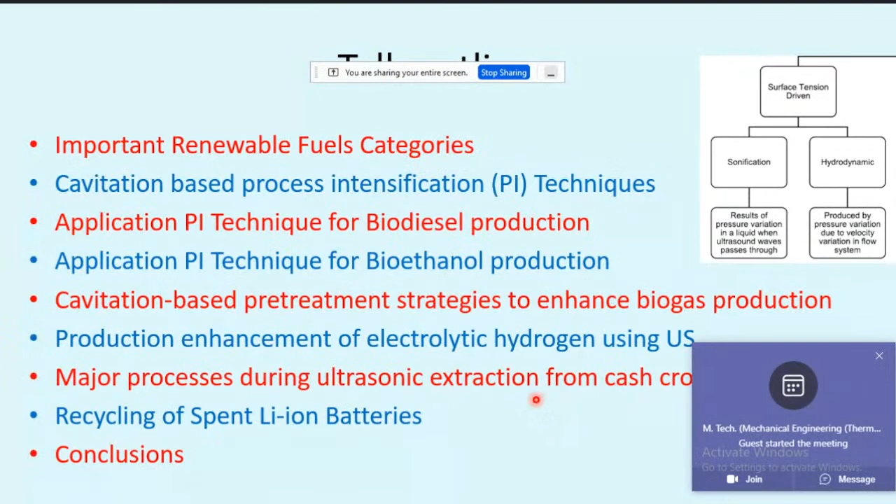Besides this, another application is ultrasound extraction from cash crops, to enhance farmers' income. From that point of view, this process intensification technique can play a very important role, and it can certainly be incorporated in agriculture. Then it will certainly enhance the income of farmers.

Of course this is not related to bioenergy, but the point is that there is recycling of spent materials, is that correct? Are there any disturbances?

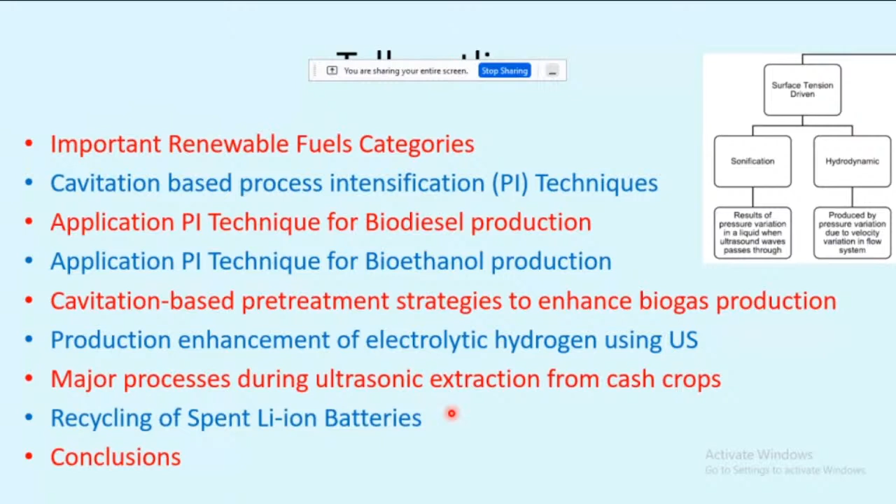So I will continue. Another important application is that nowadays a lot of stress is given on lithium-ion batteries, and once the battery is spent, what to do with that? We can have recycling of spent batteries, and these techniques can play a very important role for sustainable recycling. That part is also very important.

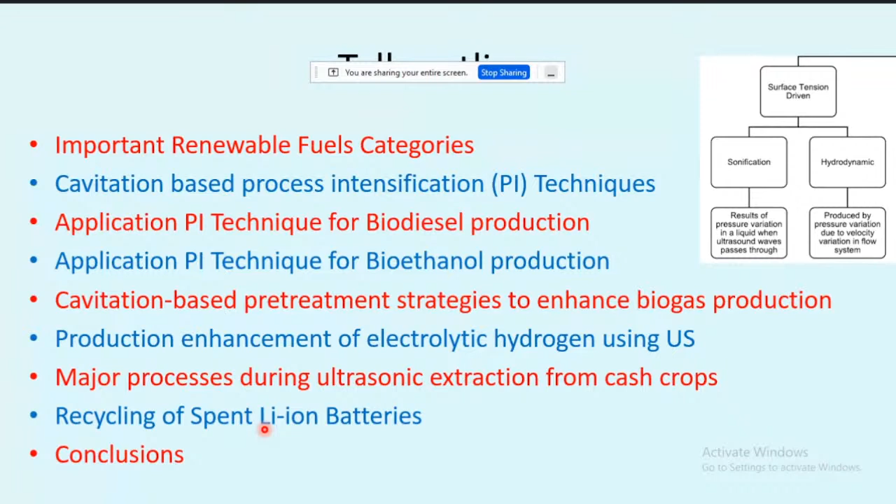With this index, I will start my discussion with the different renewable fuel categories. The main fuels used for energy are: biodiesel, a substitute for diesel; bioethanol, a substitute for petrol; hydrogen, which is added with natural gas to increase flame velocity so that performance in a gas engine increases—in Delhi, natural gas is used with a percentage of hydrogen mixed in.

But what is the sustainable source for hydrogen, and the techniques should be energy efficient as well as industrially viable? People are still searching, and across the world people are working on this, because hydrogen is considered the best fuel as it has no impact on the environment.

Besides this one, biogas—since we are an agriculture-based country, biogas is not a new thing. But how to increase the quantity as well as the quality of biogas, that is the challenge. Besides this, the battery is another introduced technology, and how this battery can also use those techniques, how we can improve it.

If you consider the sources, categorized recently, you can say Tamjidi et al. has classified the different sources: vegetable oils, animal fats. Of course, in our country, animal fats are used little due to religious purposes, so we are not using that one. Otherwise, lard, tallow, poultry fat, fish oil can be converted into biofuel.

Vegetable oils, the edible oils, are there. In our country, the price of vegetable oils is very high, and if you convert that one, there will be a lot of problems—the food versus fuel crisis is there. So we cannot use edible oil for conversion into biofuels.

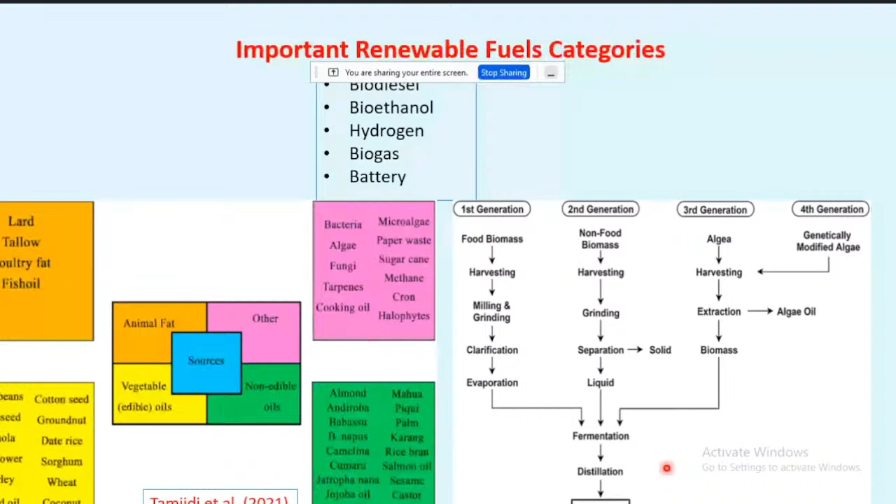Before I come directly to the sonoreactor, let me classify things. Normally, in conventional techniques or reactions, mechanical stirring is the most commonly used method, used by people for the last 3 to 4 decades.

In that case, two immiscible layers of liquids are continuously stirred using mechanical stirring. I have not shown the diagram, but due to diffusion, which is a very slow phenomenon, it is time consuming, sometimes requires high pressure, and requires reflux conditions. So this conventional technique has become outdated, but there is no choice.

Your industry follows it until unless some alternative is given to them. It's time consuming, energy intensive, and requires a lot of stringent conditions. Due to that, conventional mechanical stirring is now almost outdated.

Now what is the substitute for that? The techniques that can substitute these conventional mechanical processes are what we call cavitation technologies. This cavitation technology can broadly be classified based on sound waves, which we call sonication, and due to pressure and velocity changes, which we call hydrodynamic cavitation. But more or less the principle remains the same, and in both cases, they are complementary to each other.

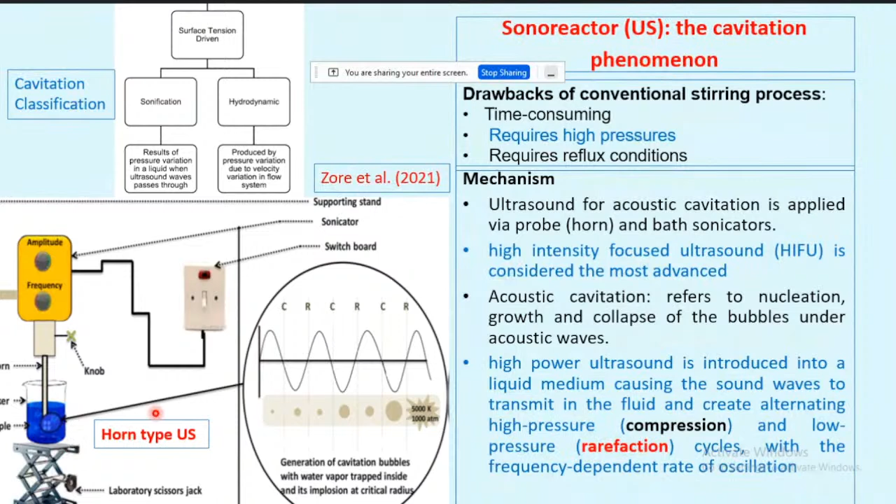This is a real success - chemistry people call it sonochemistry, physics people call it sonohydrodynamics. We shouldn't label it just as chemistry; nowadays mechanical engineers and even environmental engineers have entered this field. If a system can solve a problem, engineers take interest, while scientists view it from the angle of enhancing reactions.

Lots of papers are available as far as science development is concerned. So ultrasound has played a very important role in developing concepts and enhancing them - its contribution is tremendous.

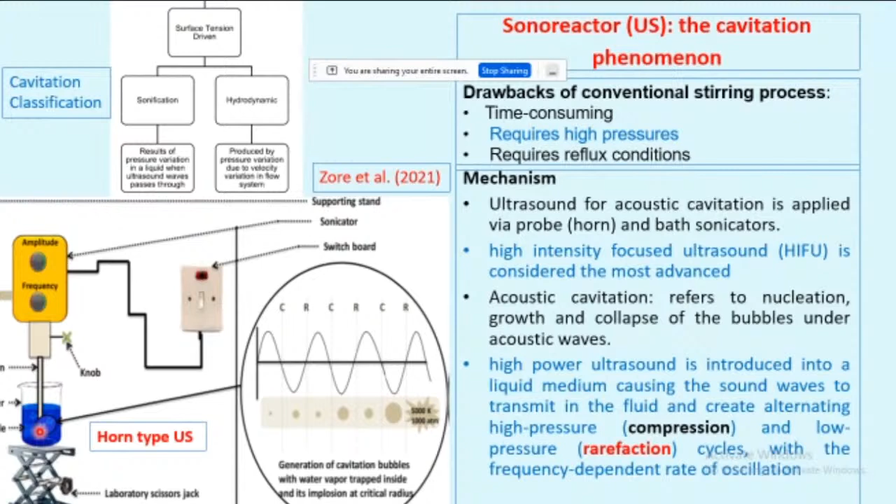So now I'll talk about the mechanism by which this continuous compression and rarefication enhances the reaction and yields very high product yield. For that, let's go to the next slide showing different features of ultrasound - these combined features work very well, which is not present in mechanical stirring.

In mechanical stirring, reactions are very slow, taking hours, maybe 10 or 15 hours. Whereas with ultrasound, even a stringent reaction can convert reactants completely into products within half an hour or one hour total. The main feature is time and energy saving, due to micromolecular mixing caused by acoustic irradiation and the generation of hotspots.

So microscopically fast changes occur - and I'm using the word implosion, not explosion. If the bubble size increases and explodes, we call that explosion. But here the bubble implodes, meaning it becomes smaller once it's broken. This implosion of bubbles causes the mixing rate to become very, very high.

Another reason is that due to this mechanism we get high yield and selectivity - selectivity may have different varieties. Physical and chemical transformations are altered because of the cavitation phenomena, causing efficient agitation, dissolution, very high heat and mass transfer rates, and reagent sonolysis.

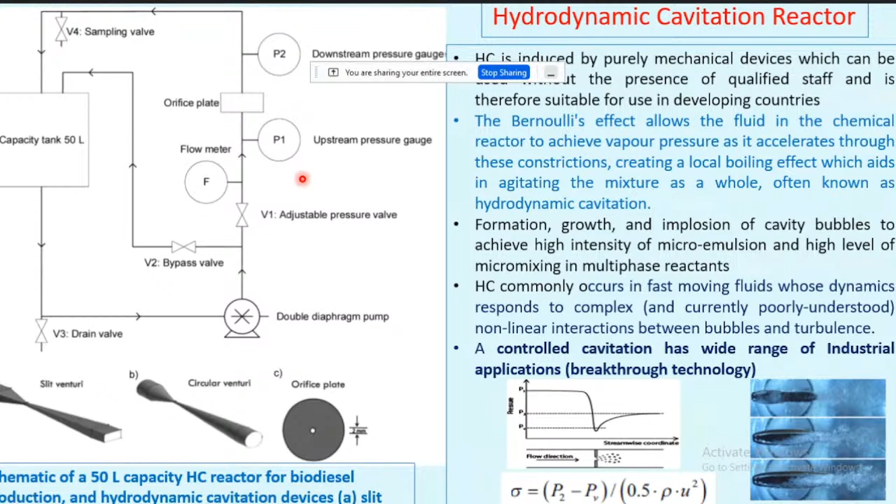Now I have talked about this hydrodynamic cavitation based technology from a scale point of view, they are much superior as compared to ultrasound. But initially ultrasound is good to get the data and adjust the process parameters.

Now another technology which is called rotor-stator technology, and sometimes people call it shock wave power reactors, hydrosonic reactors, various names are there, but rotor-stator technology is well established in the literature.

Now this technique, what happens, it is a very simple one, but it was developed in industry, and industry has earned a lot of money in Europe and other places, and it has kept it as classified technology because nobody understands it, and it has been kept very confidential for the last 7 to 8 years.

But finally it has come into the open market, and I have seen that even still the number of papers available is very less. Hardly there are, say, 3-4 papers in biodiesel, and in other fuels there may be almost 3-4 papers. So hardly 10 to 15 papers are available. The reason is that this is a very, very efficient technology and very simple also.

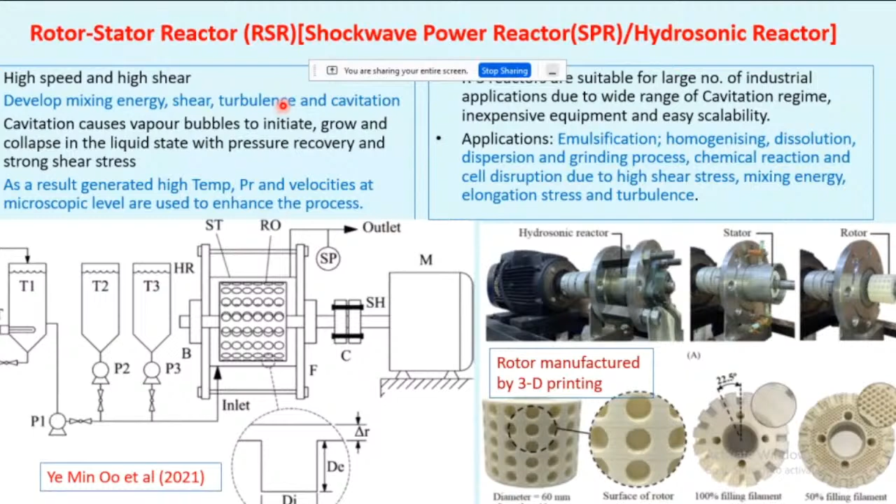Now the last one, which is again typically gaining momentum. In the beginning of my lecture, I told you that mechanical stirring has drawbacks in terms of hours required. But surprisingly, in the last year, people are doing experiments even with mechanical stirring by modifying the RPM. Most mechanical stirring operates around 500, 1000, or 1200 RPM - this is considered small RPM.

But there are devices around 10,000 RPM - this is hand blender technology. Industry produces this hand blender technology, and we can have this blender at 10,000 RPM or more. At this RPM, near the blades, the same cavitation techniques can be generated, because the fluid in contact with the blade generates cavitation conditions, and due to those conditions, bubble formation, growth, and collapse of bubbles takes place. Due to that, whatever we achieve through ultrasound, hydrodynamic cavitation, or rotor-stator cavitation, we can generate through these techniques.

A 250 ml sample size was used, converted into this continuous reactor. Even in static reactors, 250 ml size can be converted into yield within 5 or 10 minutes - the only point is how to do the scalability of that. In this case, one group in Thailand used this hand blender. Another group used a fruit blender, where again the RPM is around 10,000, and they could convert the reaction very fast.

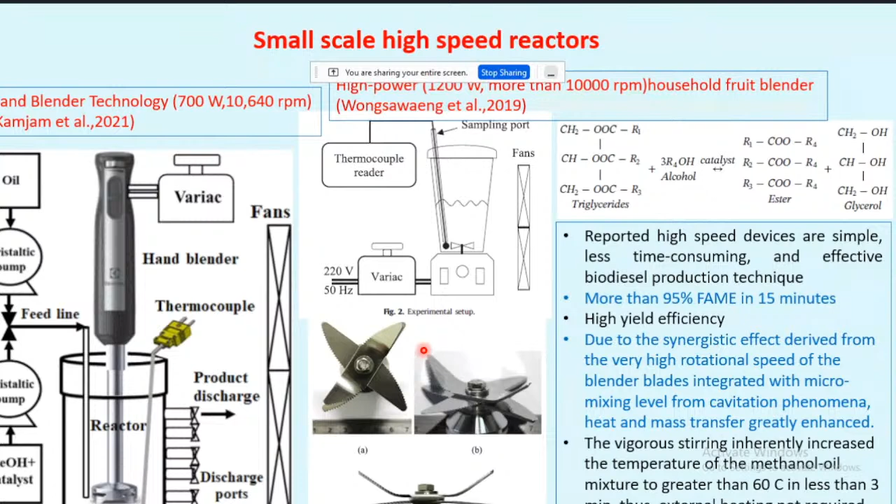Now I'm coming to biofuels, and remember that as a faculty member, as a scientist, you always have to take care about the policies. If policies are favorable, then we have to switch over to the techniques, because ultimately the funds come through government, and funding depends upon the policies.

From the policy point of view, earlier food grains were not permitted to be converted into bioethanol. But now in 2018, the policy has changed, and damaged food grains like wheat, broken rice, and grains unfit for human consumption can be converted. So almost you can say surplus quantity of food grains can be converted into ethanol - the government has given permission for this.

Besides this, what happened is the ethanol blended petrol program was started. In this program, due to food grains not suitable for human consumption, around 150 crore liters of ethanol was blended in petrol.

And due to this, we have saved foreign currency of 5,070 crores, and there is also a reduction in carbon emissions - roughly around 30 lakh tons of CO2 emissions was reduced.

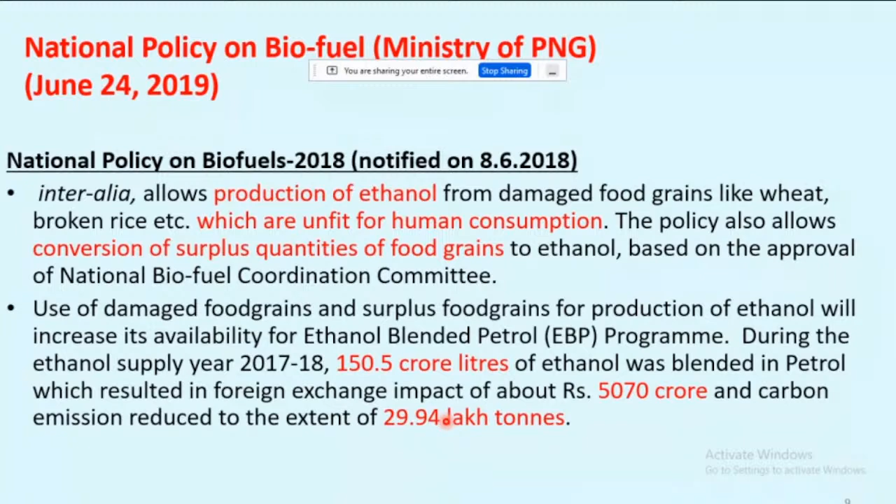Let us see what happened in the case of the two important things: bioethanol, which is a substitute for petrol, and biodiesel, which is a substitute for diesel.

From the target point of view, our target is 20% blending of ethanol in petrol by 2030. And recently I heard that in the new policy, the target is preponed - even by 2025, the government has an idea that they want to achieve this 20% blending of ethanol.

For biodiesel blending, normally due to failure of the Jatropha program, still almost you can say it is less than 1%, or around 0.12%.

This applies to the whole country, except in the Union Territory of Andaman and Nicobar and Lakshadweep, where OMC blends are around 10%, because there petrol is not readily available, so in that case they are already using 10% ethanol in petrol.

Now another important policy is that we have to implement BS6. BS6 is a very stringent regulation, and it has already been applied in Delhi, and in the other parts of the country it was applied from April 1st. So in that case, the role of renewable energy sources can play a very important role.

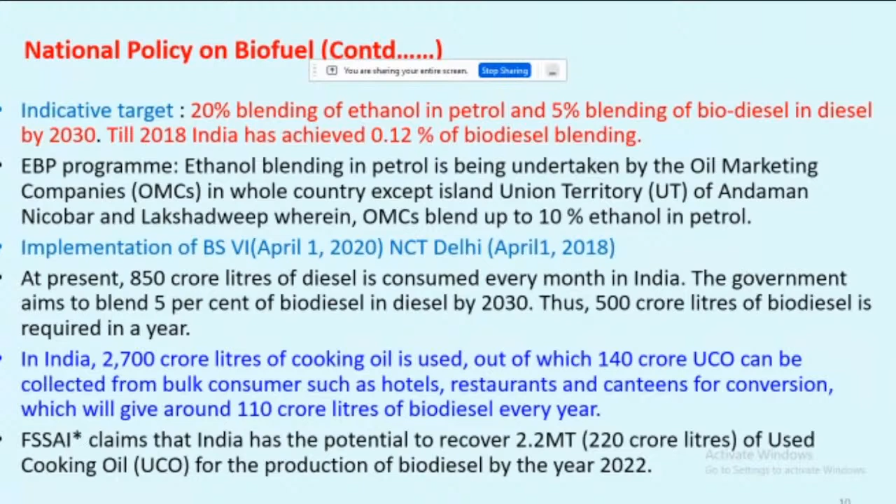Now, from the technology point of view, I have told you. Now, what additional efforts can we do so that even these techniques can be further improved?

In most cases of biodiesel, whether it is a question of oil extraction from the seeds, we have to extract the oil from the seeds, and the conventional technique used is compression. Compression machines are there, and using these machines to extract the oil from the seeds, due to electricity consumption, high pressure is required and very high electricity consumption is there. So whenever you produce biodiesel based on oil through this compression process, 30 to 40%, or even in some cases 50% of the price is due to this compression process itself. So is there any way, is it possible, that we can directly get the oil from the seeds itself?

And even those techniques can also be suitable for extraction of oil in conventional cases, for example, edible oil. Even in most cases, compression process is used for edible oils also. So a huge amount of electricity is consumed, and the price of extracted oil is high because the operating cost is high. For that, this extraction process, called the in situ process, means we can extract oil directly from the seeds itself, is also called reactive extraction. In that case, we just grind the oil-bearing seeds, put it in a mixie or a typical grinder where we break the outer cell, and it becomes a paste.

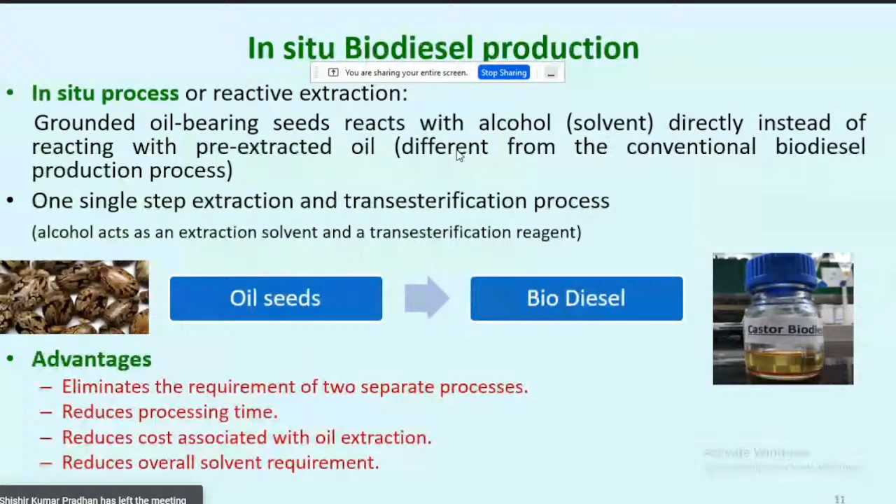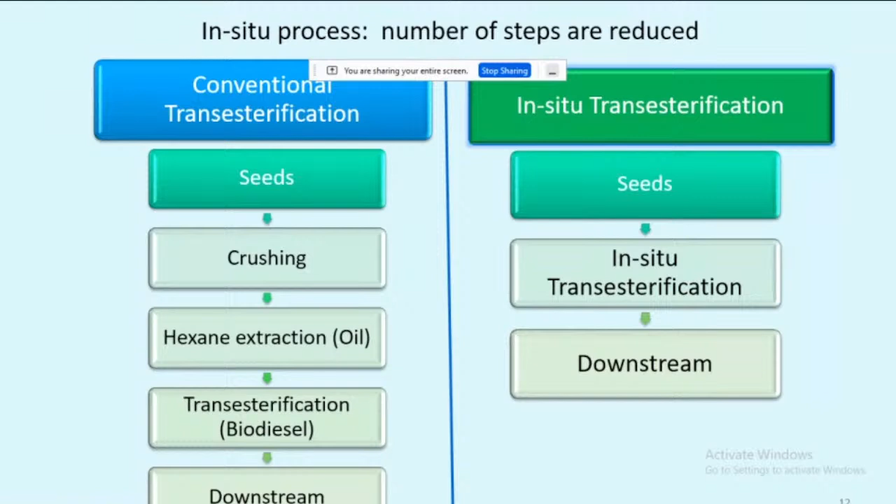So overall, you can say the number of steps in conventional transesterification of biodiesel: seeds are there, you have to crush it, then hexane extraction is there, transesterification, downstream processes. Whereas in in-situ transesterification, seeds, just crush the seeds, grind the seeds through this mixie, and then there is directly in-situ transesterification, and downstream you can get the biodiesel. The number of steps are reduced in case of this in-situ process, and this I am talking about biodiesel, but this can be applied for any type of seeds for extracting the oil. This is a very important step, and in that case you can save a lot of money in terms of operating cost.

Before I come to the apparatus, try to understand the mechanism of solvent extraction, how the oil can be extracted by the solvent from the seed itself. Outside it is the solvent. Solvents are of two types: one is non-polar solvents, another is polar solvents. Normally alcohols are the polar solvents.

Now what happens? The solvents are capable of penetrating the cytoplasm. This particular portion is called the cytoplasm, inside that one. Through this portion we have to bring the lipid and the other portion. Now, polar solvent can also enter, and non-polar solvent can also enter, but the point is that van der Waals forces are very weak in case of non-polar solvents, so they require a lot of time.

Whereas if you use polar solvents, due to hydrogen bonding they are very fast. So in the first step, this polar solvent will enter through this portion, into the cytoplasm, and interacts with the neutral polar lipids. That is called step 2, to form an organic solvent lipid complex.

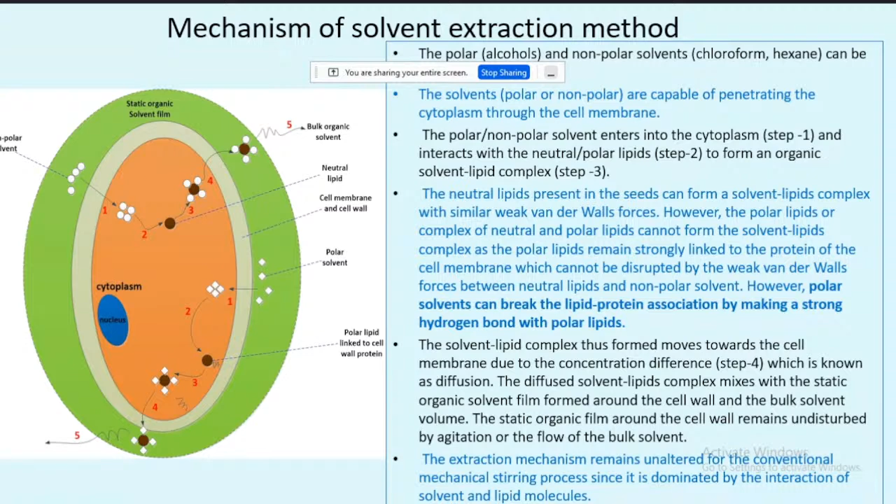Three fields which are perpendicular to each other, due to this, a huge amount of turbulence is generated inside the microwave. And in case of microwave, what happens? There is a continuous dipole and non-dipole molecules are there. The molecules are structured in a particular direction.

I will give you an example. When we cut the lemon, it requires a lot of effort to get the lemon juice out of that particular cell. Now, if you just put a lemon for 10 seconds in the microwave and then cut it, with a single compression we can get all the juice. Why? Because this whole structure of lemon is broken due to this microwave electrical field. You can check this at a household microwave.

So this combination of in situ and hybrid, we have done it, and we have got very good results that total cost can be reduced using this microwave. Only the issue is that microwave plus ultrasound, this hybrid reactor, how to make it for scalable purpose. That challenge remains, and it is not a big one. Any industry, if they come out with some knowledge of ultrasound or microwave, they can go for a bigger size.

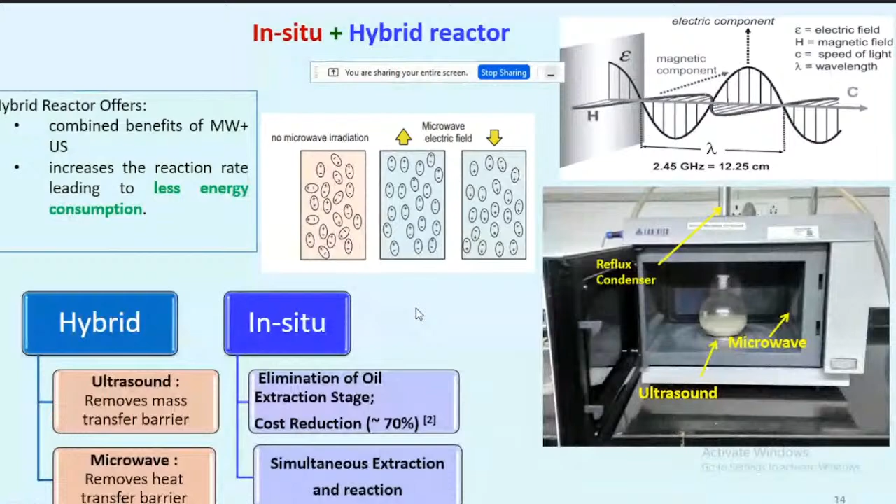So continuing sequentially, ultrasound and microwave will also enhance the reactions. So from that point of view, again, it is a very important one, and we have got very good results. From a scalability point of view, it's also good because microwave and ultrasound are not hybrid here; in that case, they are sequential.

So almost we can say that in that case, 10 to 20 liters we can get in 15 minutes. So if you increase the capacity, you can convert into a continuous type of reactor also. You can continuously convert into batch type of reactors depending upon your requirement. So this is the simplest reactor at laboratory level we have produced, and it is giving excellent results. Even our recent papers will show this.

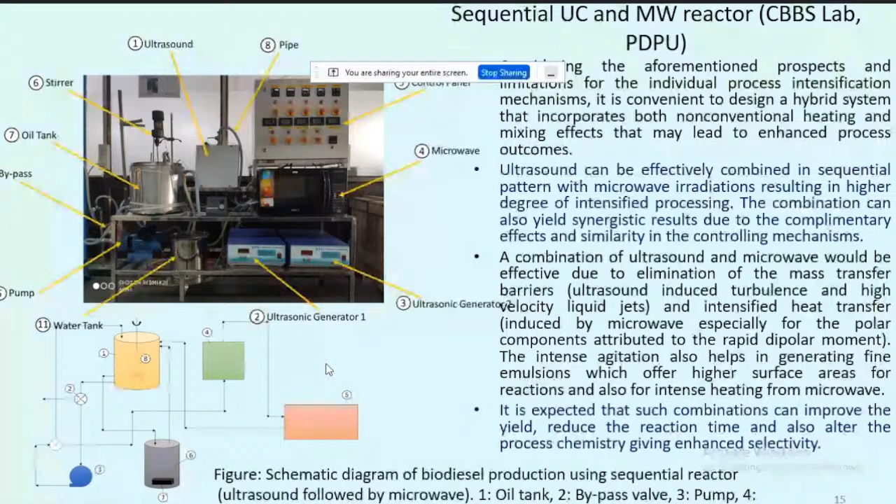Till date, almost 2018-2019, scalability was an issue in case of ultrasound. Industry wants a big size. So how do we convert laboratory results into something industrially scalable? Developed countries have very intelligent people - particularly two companies, French company REUS and Hielscher company from Germany, have been working in this area for the last 10 to 20 years. Even small size reactors, they can convert into 1,000 liters per hour capacity.

So here, all these are small, from 40 liters per hour to 1,000 liters you can convert, and these are very different multi-frequency components that are being used industrially. But the issue is that if you import it, the price will be high. So Indian industries, in combination with faculty and scientists, should design this ultrasound indigenously so that the scalability issue in our country can be resolved.

The multi-frequency ultrasound they are using - even the size is very, very large, 1,000 liter ultrasound, and inside that, the horn is there. But in our country, size is not very high - small scale ultrasounds are very commonly used. But if industry demands and takes up this challenge, then obviously manufacturers will come with higher size, bigger ultrasound, and therefore it can resolve the long pending issue of scalability.

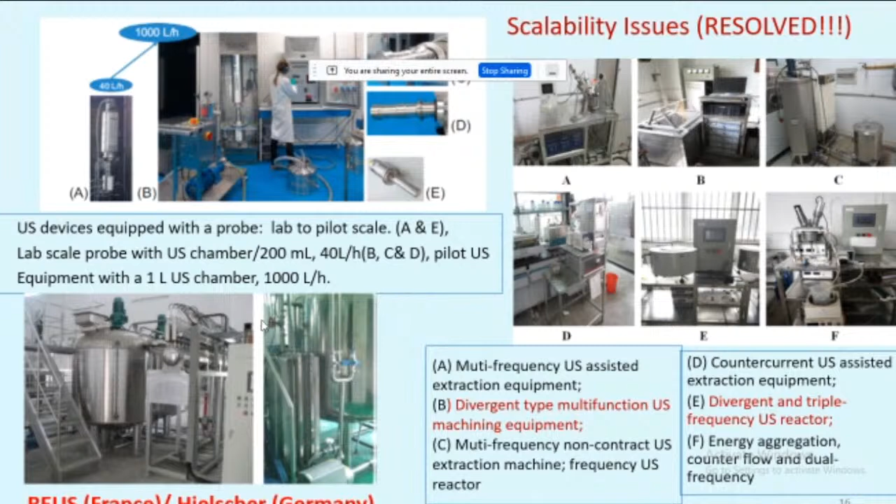So that answer you can find out - up to a certain extent, this issue is resolved if you go for indigenous manufacturing of this ultrasound in a large capacity. Of course, at the laboratory level, we have produced this, and you can go through this paper - it's open literature and available. I will not discuss that further.

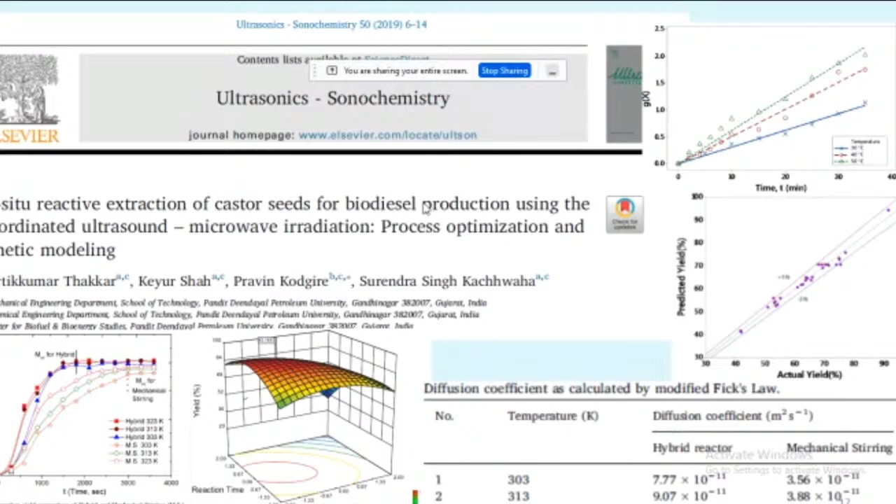Now, quickly, I'm just giving you glimpses of these technologies, which can be very efficiently utilized either for pre-treatment process or direct conversion. So for the last 10 to 15 minutes, I'll just give examples of these things.

Those working in the area of microalgae know the dry algae process is very energy intensive, because making it dry requires a huge amount of energy to remove the water. So therefore, people prefer the wet algae process. In the wet algae process, when you pass it through hydrodynamic cavitation, the intact cells get broken, and once the cells are broken, the reaction becomes very fast.

This has been applied at our ICT, the Indian Institute of Chemical Technology Bombay, which is very popular in the development of hydrodynamic cavitation. Professor Gogate and Professor Aniruddha Pandit, who is the director of that institute, have been working in that area for the last 20 years. They have developed the expertise and are considered the leading ones in development of these cavitation techniques.

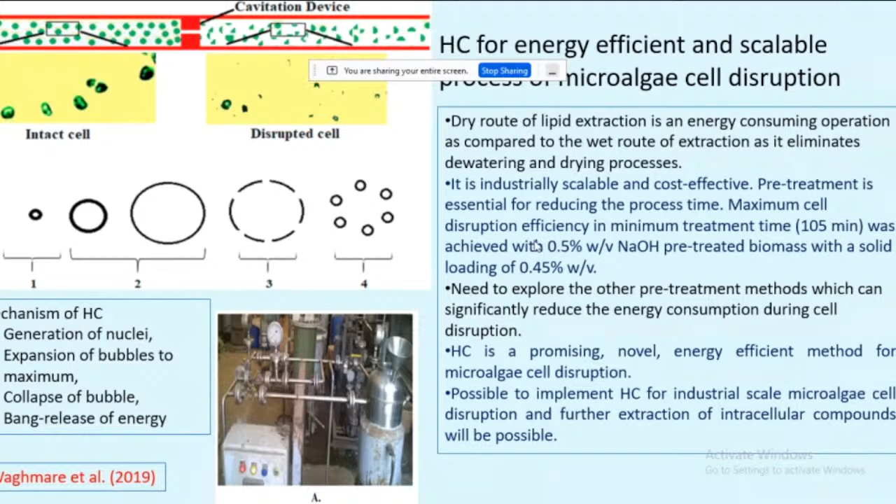So in short, hydrodynamic cavitation is a promising, novel, energy efficient methodology, and industry can use this hydrodynamic cavitation for breaking microalgae cells and further extraction of intracellular compounds. So for microalgae, if you use this as a pre-treatment process, certainly your results will be enhanced - results will be very, very good.

Again, the rotor-stator technology I showed in the beginning - in that case, you can go for a very small size too. This is the open lid, right? If the lid is covered, I'll just convert this to my rotor for one minute. This lid, if you cover it, gives a very small size rotor-stator technology for a small sample. This is the rotor - there are blind cavities, and inside that, cavitation conditions are generated, and in a very fast way, small size samples can be converted.

This technique I've already explained, but with a pump you can connect it, and Russians have used this technology to convert very hot water so that ice surfaces can be removed due to ice fall. In Western countries, they have different applications. In our countries, we can use this for different application purposes, and reactions can be utilized.

The point with these techniques is that whenever relative motion takes place, forces exert on the liquid in the space between the two plates. This one will be the cover plate, and this is the open one - the cover plate will look like this. So this reactor will have an inner volume of around 200 ml, less than 200 ml, together with the detached rotor plate.

Due to this device, cavitation conditions are generated and reactions happen very fast. This is a typical robust device. No rocket science is required, and quickly you can apply it. It's used for biodiesel purposes, and even in petroleum technology for extraction of petroleum, lubricants, etc.

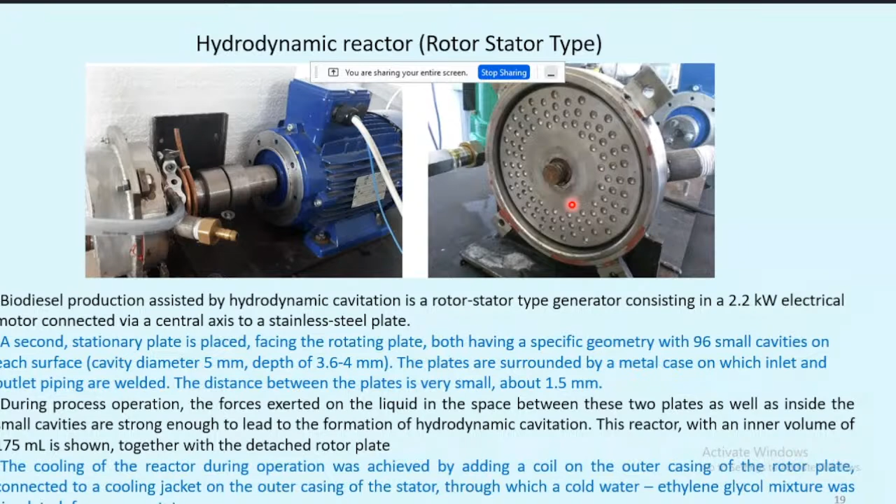Another application is for bioethanol purposes. In Italy, this Cavi beer is a patented technology using a venturi like this. The malts and other processes can be reduced in number. I will show you in the next slide how you can directly get alcohol for consumption as well as for application purposes, because beer is an integral part of Europe and the quality must be maintained. Using these techniques without compromising on technology, they can get a very good amount of alcohol for beer as well as for different applications.

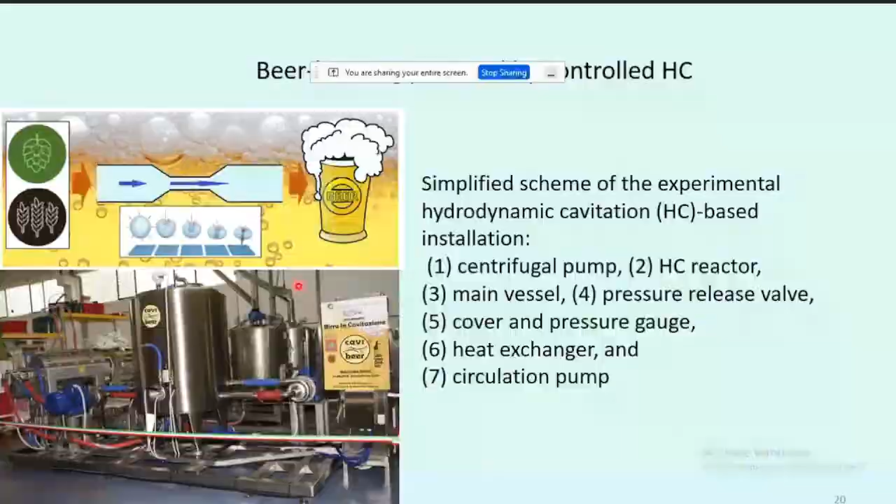This is a typical process. I won't go into details, but the traditional process has a huge number of steps: milling, preheating, mashing, mashing out, filtration, lautering, then heating. These are energy intensive processes. If you look at hydrodynamic cavitation for grains, all these processes are combined into mashing, and quickly the number of steps is reduced, number of temperatures is reduced, time consumption is reduced, and you get the same product with equal quality.

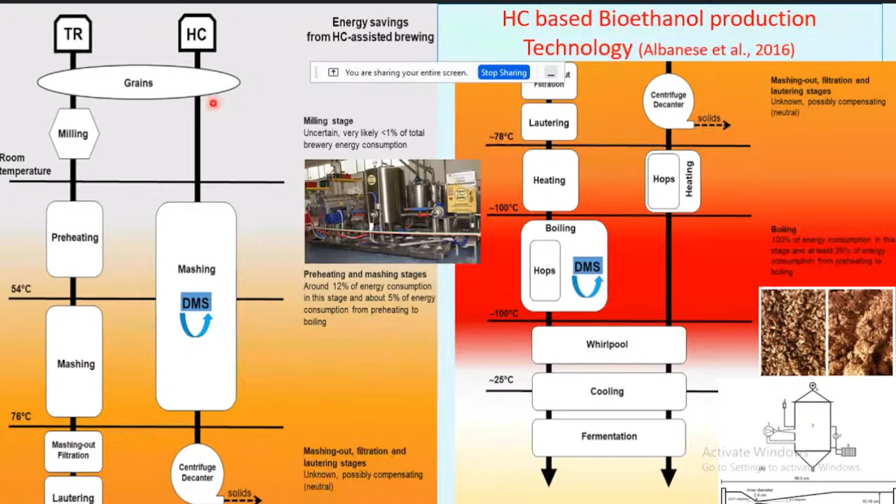This is a typical reactor developed in Italy. If you look at the conventional process compared to this, I'll show you in this slide that the main advantage is the number of steps are reduced, temperature conditions are reduced, and energy saving is there. Therefore hydrodynamic cavitation is a superior technique compared to the traditional technique for bioethanol production. This has been well proved, and in 2016 a paper was produced, and recently new advancements have also come.

So bioethanol also can be produced by using hydrodynamic cavitation. This is the main outcome of this research.

You can look here. In conventional techniques, after extraction, it looks like this. Whereas in the case of cavitation techniques, almost all the essence is purely extracted from this portion in a very efficient way. Due to that, the yield quantity is very high. These are the venturi methods they have used, a patented venturi of a particular size and shape developed by an Italian group.

Once you produce the alcohol for consumption purposes, the foam stability and other things are tested, and as per the standards, this foam test has been cleared by the alcohol produced from this process.

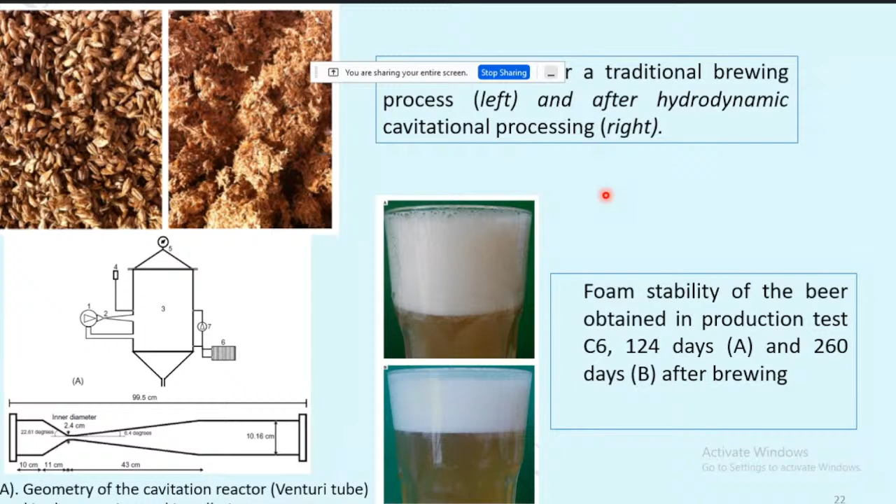This means bioethanol can be easily produced using these cavitation techniques. So in our country, we don't have to go for big size plants. Even for small scale plants, you can go for a substitute for petrol, and for small size plants, a substitute for diesel as biodiesel. So for agriculture purposes or small scale purposes, having these indigenously will serve a very important role.

Nowadays, a burning topic is that lignocellulosic biomass can be converted, because this lignocellulosic biomass consists of lignin, hemicellulose and cellulose.

They are very bonded, in a stringent way they are bonded. The point is how to achieve disintegration, how you can take the glucose and other portion through the hydrolysis method.

What kind of shape does this venturi have? Different venturis people have tried, and they found that a 16-hole venturi plate is sufficient to achieve this target. So this is a very simple one.

If you give this pre-treatment process for lignocellulosic biomass for production of alcohol, it is a very easy way one can do it. It is not rocket science. Even other disciplines, other than chemical disciplines, can also enter into this in a very efficient way.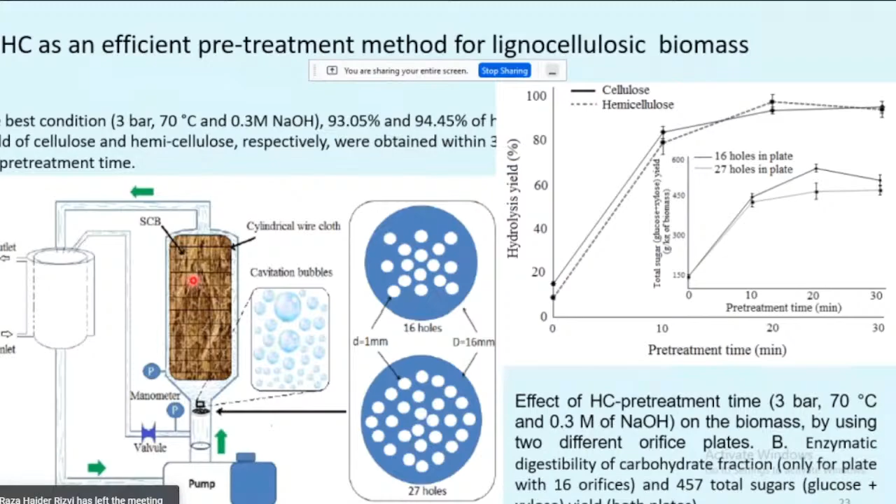Of course, I have already discussed the shockwave power reactors. These shockwave power reactors have a wide range of applications, other than petroleum, biodiesel, bioethanol, and non-fuel applications. People have come to this because it is a very efficient way for producing emulsions and other things. Some people call it a shockwave power reactor.

In the beginning, I called it a rotor stator, because rotor is a moving part and stator is a stationary part. This is a very important technique which has a wide range of applications we can insert in our country.

At present, whether it is the pharmaceutical industry, dairy industry, or fuel industry, we are using conventional techniques. Even in the Middle East, Iran, etc., they are doing a lot of research, and they are producing excellent papers.

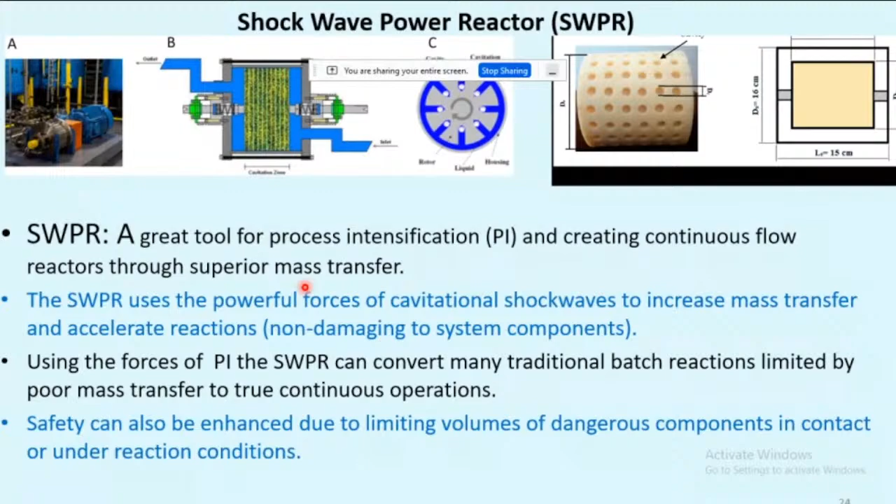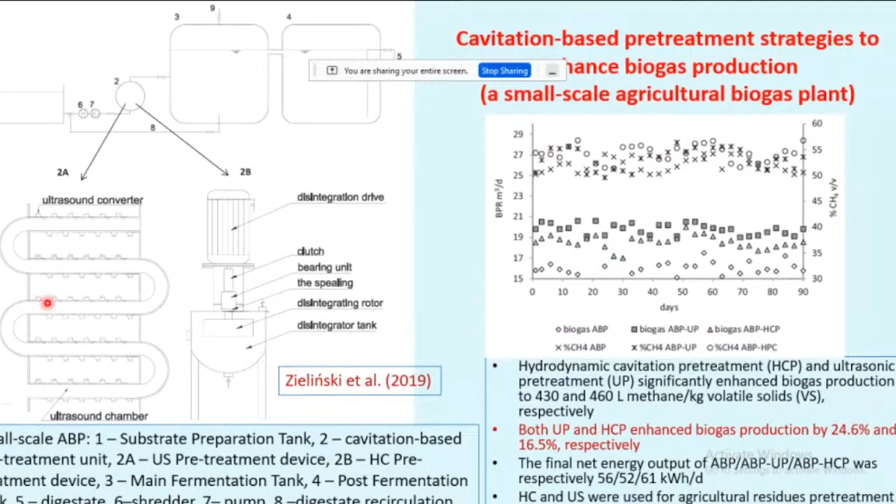Now, since ours is an agriculture country, biogas production is very important. Here is a biogas plant, and in this biogas plant, if you retrofit it by putting this additional device, which is called the typical continuous ultrasound converter, through this portion you can remember that normally in a biogas plant...

We use manure of cattle, and plus we can add biomass. Combination is always preferred because as an individual biomass, the quantity is not much. If you use pure cow dung or manure of animal alone, the results are not good.

But if you have a combination of biomass plus cow dung, it will give you very good results. And if you produce a substrate in a tank and pass it through this ultrasound, the biomass disintegration becomes very fast. That is called biomethanization.

And due to that, what happens? You'll see the results. There are three things. One result is the biogas production rate. Without these devices, almost 15 to 17 meter cube per day we are producing.

If you use this ultrasound, which is a homogenizer almost like a rotor stator assembly, you will see that 15 to 20% more quantity of biogas is produced relatively.

Another important result is there. Not only is the quantity increased as I've already shown, but the quality is also improved by percentage increase of CH4.

So here the point is that, as compared to the conventional technique, if you retrofit this device, the CH4 percentage, which was earlier hardly 45 or something like that, now the percentage is also increased.

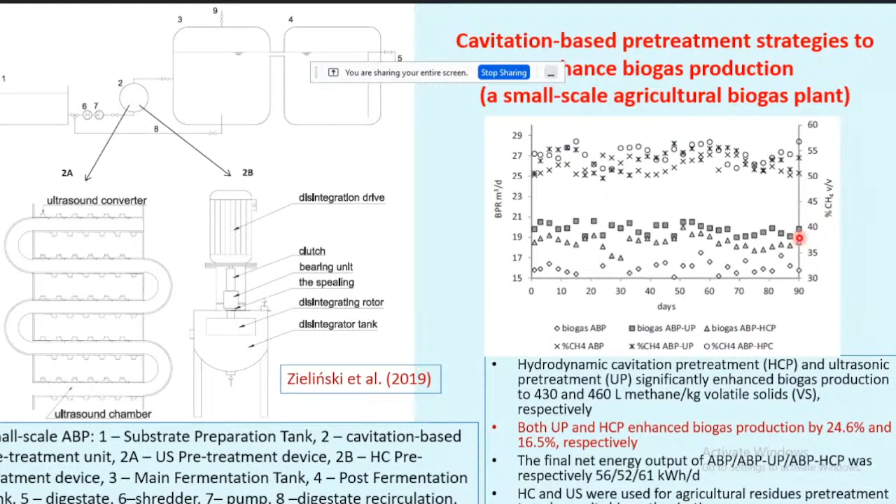Due to that, the main conclusion is: the percentage of biogas can be increased by this retrofitting device, and the quality of biogas can also be improved by increasing the percentage of methane. That has been experimentally proved. So this is one application.

The concept is that nowadays, if you start an industry, you cannot say you will use only the seed. You can get the seed, the stem, the leaf - all things are suitable. Suppose if you have a plant of 1 kg of castor plant, it will have this much fraction as seed, this much fraction as stem, and this as leaf. So our techniques must account for that.

Each and every component is important, and industrially viable processes are available nowadays where we can get the product in terms of biodiesel, methane, ethanol. So almost all fuel quantities can be earned. And if you have a combination of these techniques, the whole process will be profitable.

That concept is known as the biorefinery concept. Now conventional petroleum industries are entering into this. Reliance has already taken a decision that they are investing 35,000 lakh dollars on this biorefinery concept. The main products will be biodiesel, biogas, and ethanol as fuel, with other products as byproducts for different applications.

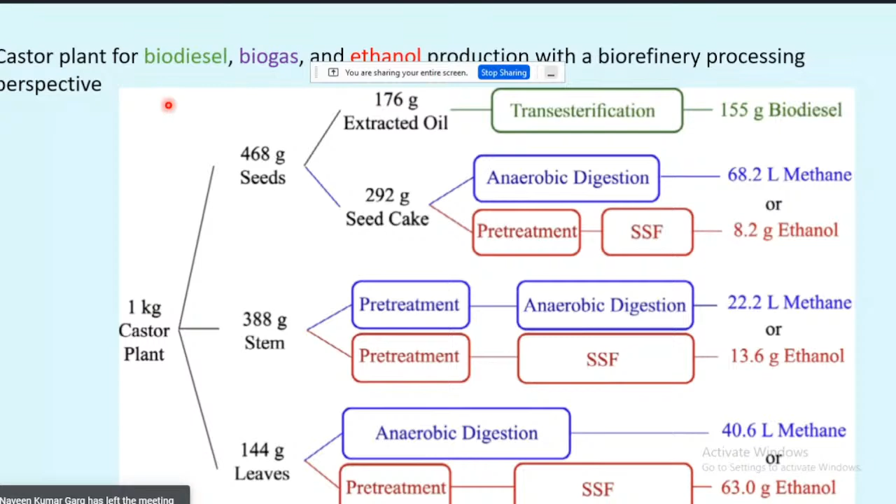Of course, hydrogen is not my area, but process-wise it's a very simple one. We can use this electrolytic process, people are using it, no issues. But if the same process happens under ultrasound, due to radical formation the electrolytic process will be enhanced, and you can get 10 to 20% additional hydrogen. If anybody gets that, it's always welcome.

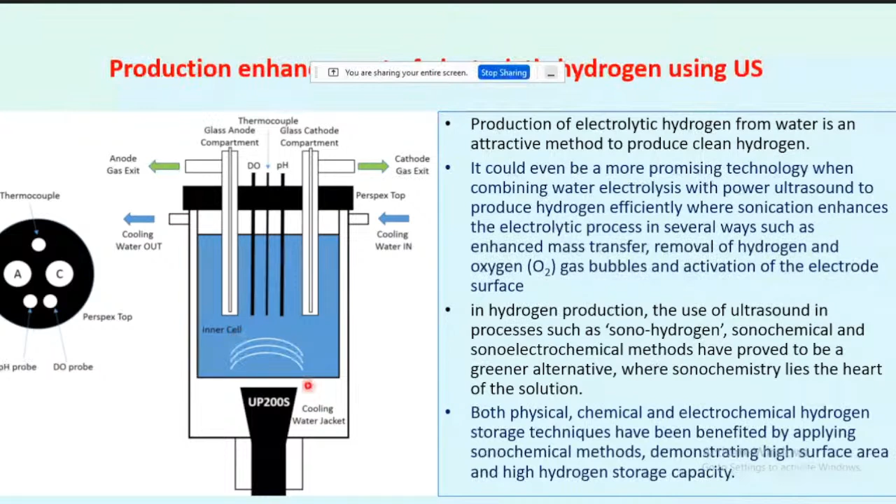So in hydrogen production, the use of ultrasound, such as sono-hydrogen, sonochemical methods, these are considered greener alternatives. Sonochemistry is the heart of the solution, it enhances your process. It will not directly be involved in the process, but it enhances it, meaning your yield quantity increases with less time and less stringent conditions. This increase in hydrogen directly helps the fuel cell, and fuel cell is the future technology. This is how ultrasound can help enhance this technique.

Another important point the government of India has planned is about cash crops. Normally the government says we have to increase farmers' income, but income just from growing conventional crops will not rise, that's a well-known fact. There are many types of cash crops where farmers grow them and sell at a very small price to the middleman.

So now these techniques in small areas, let me give an example. Potato price is very small, but the moment potato is converted to chips, the price rises 10 times, 20 times. To produce these chips and other food products is not rocket science, even very small techniques can convert that. So value addition is a very important one.

These small ultrasound devices, using cash crop seeds, can convert them into very important nutrients which have wide range of applications for medicinal purpose, eating purpose, or other things. Ultrasound can play a very important role here, and if these techniques are inserted with agriculture, the farmer's income will tremendously grow.

Here again you can see ultrasound, this is a matrix, and through this matrix the implosion of the ultrasound takes place, the outer cell will break, and these nutrients can be collected.

So in pharmaceutical industry, medicinal purposes, horticulture, a wide variety of applications are there. At present, seeds are there, you have to boil them, vapor formation and condensation take place, and these are energy intensive. Here, without any boiling, due to ultrasound and diffusion process, you can quickly extract, and they are very efficient.

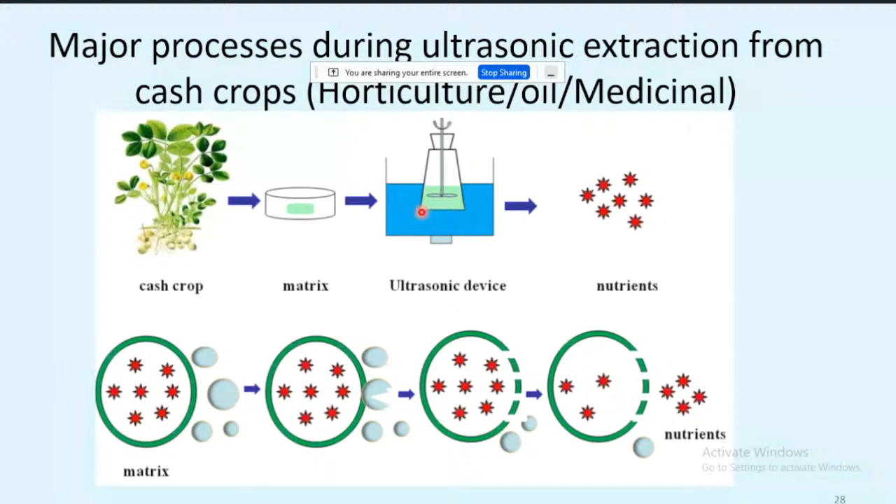From an industry point of view, this soxhlet extraction is there, where almost solid liquid particles are present, and through this you have to do the boiling process. Pure soxhlet means through boiling and condensation it will go, taking around 6 hours. But if you combine this with ultrasound, you can do the process in 30 minutes.

That is the typical advantage of what is called the sono-Soxhlet method, where partly it will be boiling, but due to this the extraction is very fast. People have developed this in France, and even this soxhlet is a very simple device. If you insert this ultrasound portion with the soxhlet in combination, the extraction of oil becomes very, very fast. This is called both soxhlet extraction and ultrasound extraction.

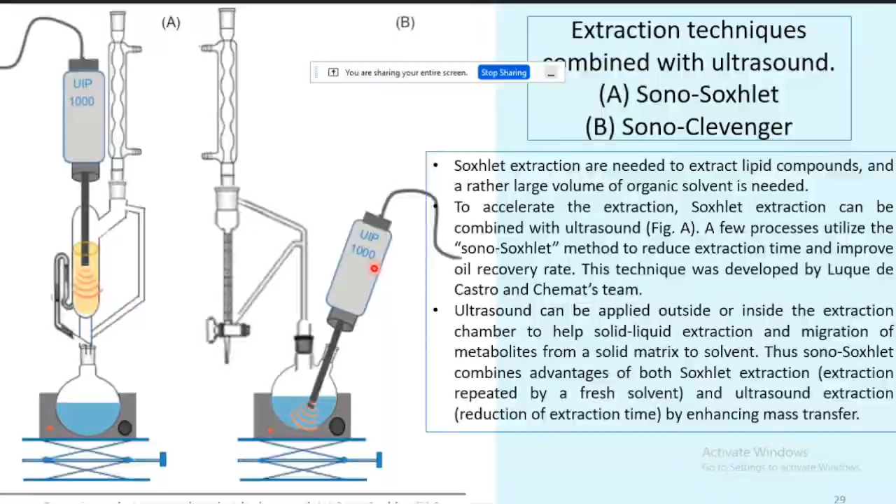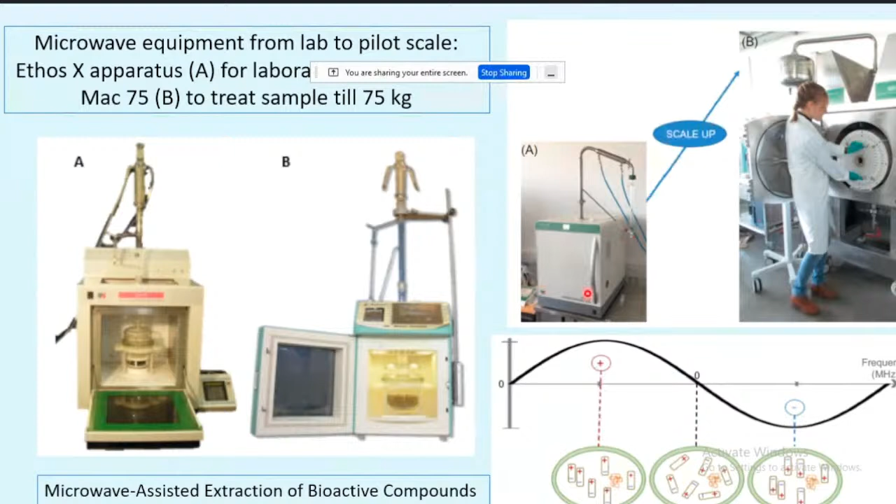This combination reduces extraction time by enhancing the mass transfer rate. This is a proper conventional technique modified with ultrasound, and we can get excellent results. Big size microwaves are now available, and phenolic compounds from them can easily be disintegrated using these devices, mainly due to the dipole moments that take place, organizing unorganized molecules through the microwave field, which is not possible in conventional heating. Due to this, microwave can play a very important role in processing phenolic compounds, and sample sizes up to 75 kg can be treated in recently developed microwaves, with scale up possible from small to very big sizes.

The main point is that from an extraction standpoint, bioactive compounds can be produced - phenolic compounds, phenolic acids, flavonols, anthocyanins, antioxidants present in these fruits, polysaccharides, and thousands of examples. Remember that pharmaceutical people, agriculture people, or other people do not know the technology, and technology people do not know the applications. There must be proper understanding between the two. Gaps should be reduced, and one should not shy away from developing the technology.

These techniques I have told you about - ultrasound, ultrasound with microwave, hydrodynamic cavitation, and rotational technology - you name the field and I will tell you it's applied there. These are all recent developments that have not yet been inserted into industry, but experts are saying these techniques can play a very important role to reduce total size, reduce electricity consumption, and address various other aspects.

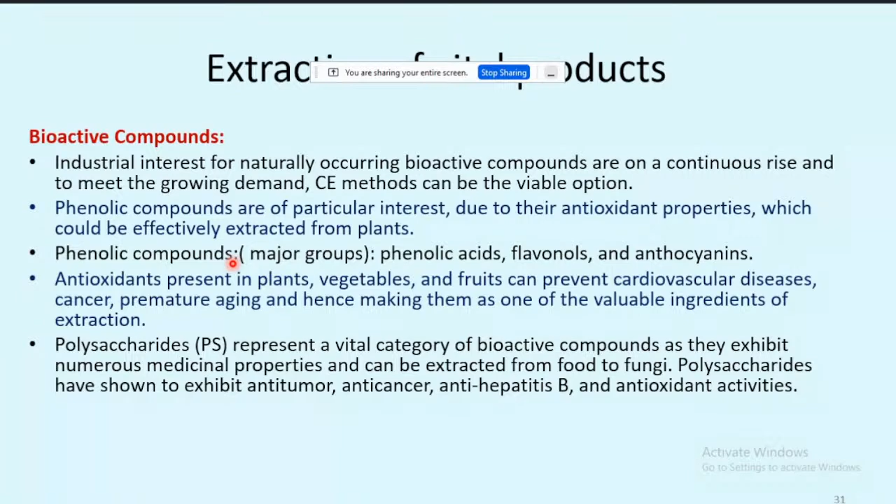For pharmaceutical applications, oil crops I have already discussed - they can be used for soap, perfumes, food flavoring, medicine, and the combination of ultrasound extraction with Soxhlet can demonstrate this. I gave an application where in 30 minutes you can get the results, whereas with individual Soxhlet it takes 6 hours. Oil crops - it is the best remedy for that.

Then lipids for fuel purpose - lipid extraction can very easily be done, and microorganisms again can be utilized. Hydrodynamic cavitation demonstrates very high lipid extraction efficiency from dry Nannochloropsis, a typical microalgae vital for biodiesel production. I am giving a couple of examples, but conceptually it is like this - our fundamentals are clear, and if the reaction fundamental is clear, then using this process intensification technique for the same reaction gives you industrial plant suitability.

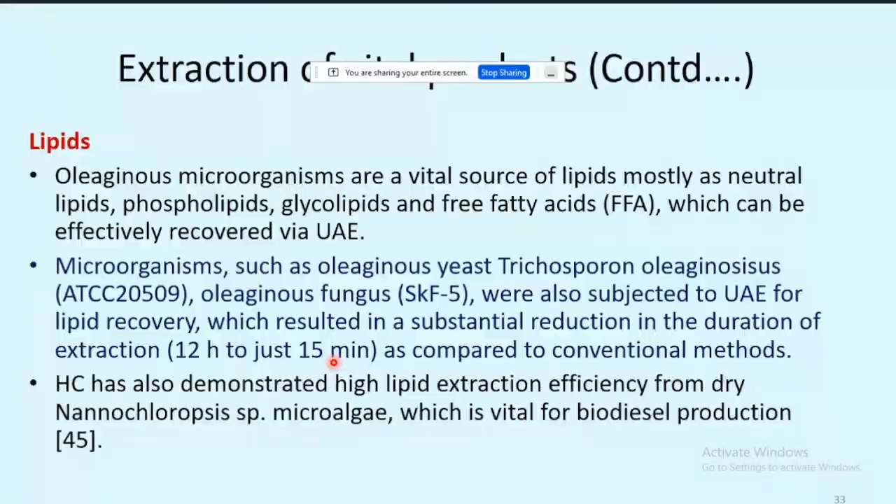In total, I am not going into the micro level, but the point is that it has a wide range of applications suitable for industry. This is one slide from a 2020 paper where they called this technique a technological breakthrough for fruits, vegetables, and various other areas, because it has a 50% saving in core processing time and energy consumption, and 25% cost saving with reduction and better reuse of waste stream.

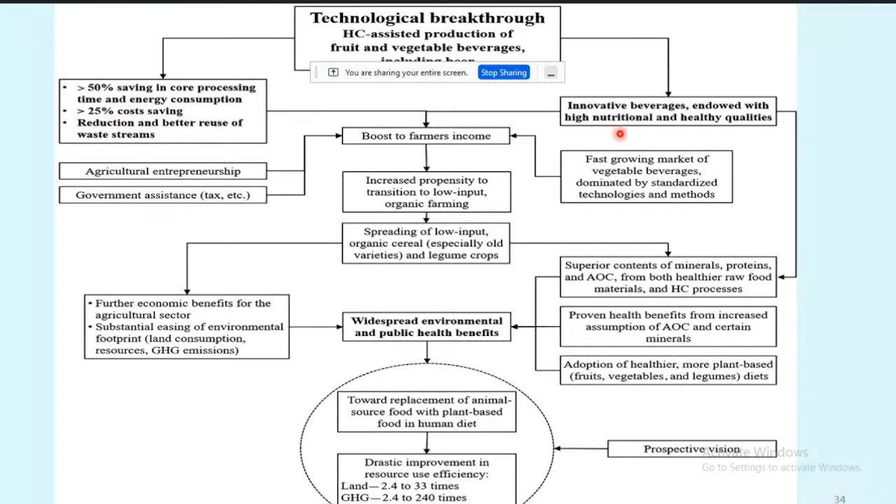Even in the developed world, people are talking about the boost to farmer incomes. Various examples and economic benefits are there, it can be used in agriculture, and due to the efficiency of the techniques, greenhouse gases are reduced. It can be applied in food technology too. Wide ranges are there, and because of that people consider it a very innovative technique as well as a breakthrough in industry. That's in brief what I wanted to say about this slide.

There is one more slide - even recycling with ultrasound, for waste lithium and lithium-ion battery powder. You can say leaching, etc. - you have to do high temperature boiling in conventional techniques. Remember that we are importing these lithium-ion batteries, and once spent, nobody has an idea what to do with them. If you throw it away, it is not environmentally friendly. So proper recycling is a very important one.

In that case, one Chinese group is working in that area because China is exporting. So almost we can say this recycling process can play an important role. And through this ultrasound, very good recycling is possible. They have demonstrated this.

Once this is possible, they have not worked in the area of hydrodynamic cavitation still. So this recycling, if it is possible through ultrasound, it will have to be automatically possible through hydrodynamic cavitation as well as rotor-assisted technology. Because this is a big problem. We are already importing a huge amount of this battery.

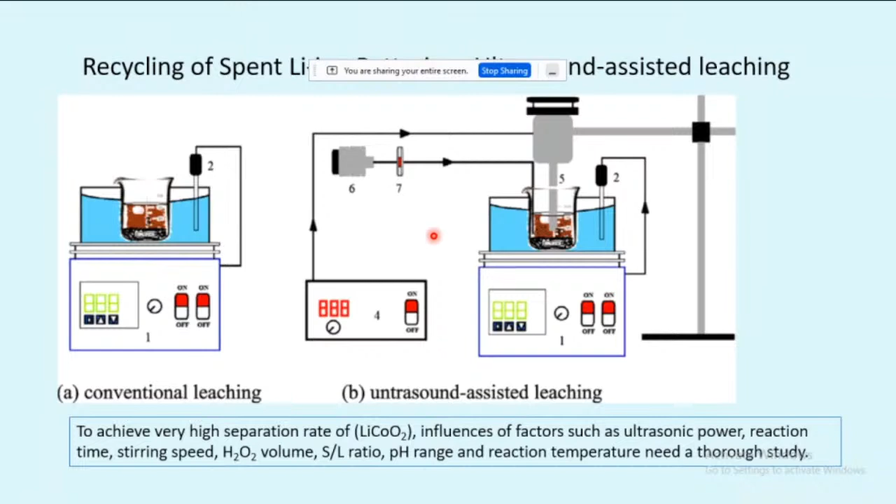Once this battery application, battery utilization is over, then the next part is that just like you cannot throw it away, like e-waste or something like that. You have to recycle that. In that case, these techniques can play a very important role.

So these are the different steps through which discharging, dismantling of lithium-ion batteries one can do, and this is very recent technique. People are trying to apply it, and it is still at a developing stage. But India has to think about how to recycle the batteries.

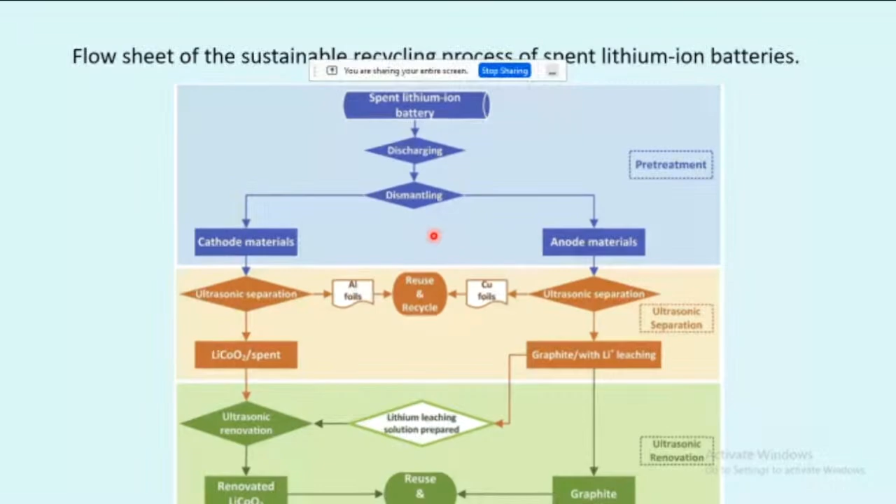That's very important, right? So now with this, I'm coming to that point. Last 2 to 3 years, in fact we have started with Dr. Paul in 2010-11 with hydrodynamic cavitation, and we have successfully developed a plant. At that time we were just only focused on biodiesel.

But later on, we have discovered that this technique can help in almost all walks of life, from water to industrial wastewater, pharmaceutical industries, oil extraction, fuel, petroleum industries, because the point is that this enhances the process. Due to that, now almost all walks of industrial life, this has been getting inserted. Every day new papers are coming, every day new ideas are coming, and these techniques can apply it in a very fast way.

So technologically, the main issue in that case is that these are problems we can call hybrid problems, or interdisciplinary research is required. In that case, individual persons, 2 mechanical people, they are called 1+1, 2, you can call it. But 1 mechanical plus 1 chemical, they will be equivalent of 11. The point is that nowadays, almost everywhere in every institution, we have hypothetical boundary lines of departments, mechanical, chemical, something like that.

For administrative purpose it's okay. But from industry point of view, from research point of view, this is a drawback. So these boundary lines we have to come out of, and teams should be prepared in such a way that mechanical, civil, electrical, or a combination of teams must be there. Then you can easily, quickly solve an industry problem, because industry will not classify it as mechanical, civil, electrical. The problem is a problem, which will have partly mechanical, partly electrical, partly chemical. So in total, you have to give the solution.

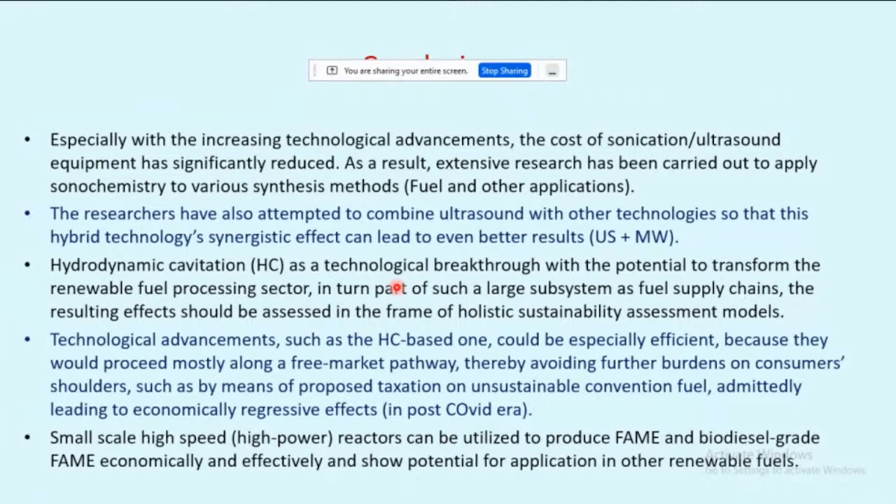It is our responsibility to see that new knowledge is coming, and how we can transfer it to our students by means of research as well as education. At the same time, from a research point of view, we have to work together with different streams of people. In that case, I can assure you that success is guaranteed.

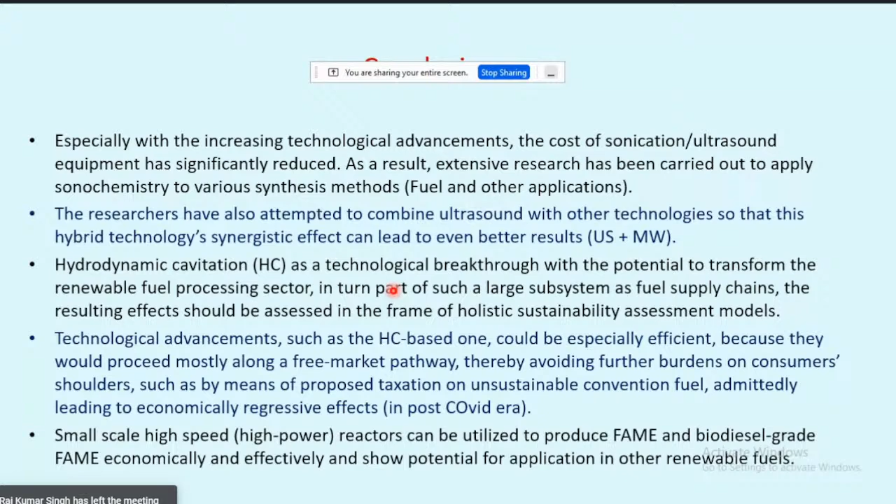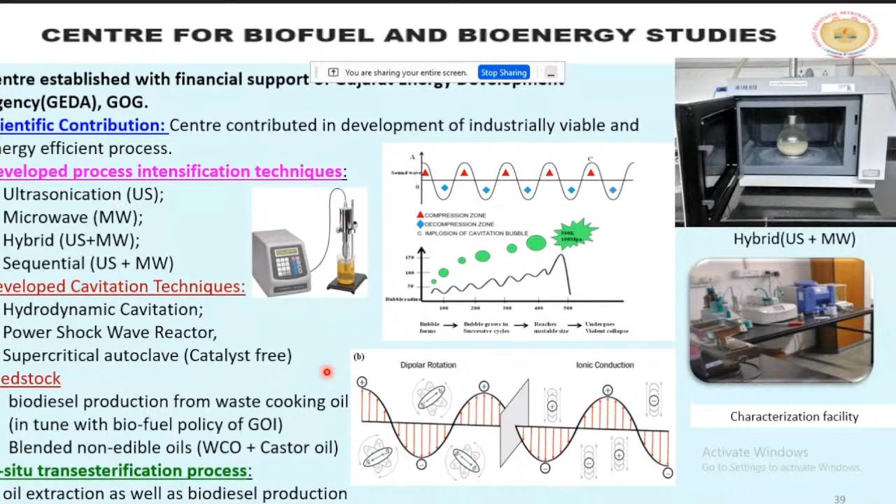These are the main concluding parts, and recent literature I have collected. These are a couple of developments that have taken place in our laboratories. With ultrasound, we have developed these reactors, and a couple of papers we are producing, with some photographs. These are small contributions of development. In our laboratories we have 5 patents and 7-8 reactors we have developed.

With this, I would just like to end with this dialogue: 'Look deep into the nature, then you will understand everything better.' That is the main knowledge - we have to go deeper, and sometimes the invisible things, if they are not visible, we have to see that we can understand nature very well. And if you understand nature very well, the outcome will be very, very obvious.

So with this, again, a lot of thanks to all the organizers, and I wish and hope that this particular STP will be a great success, and this will be, I can say, a very, very important one. So with this, I am ending my lecture, and if there are any question answers, I will be glad to answer them.